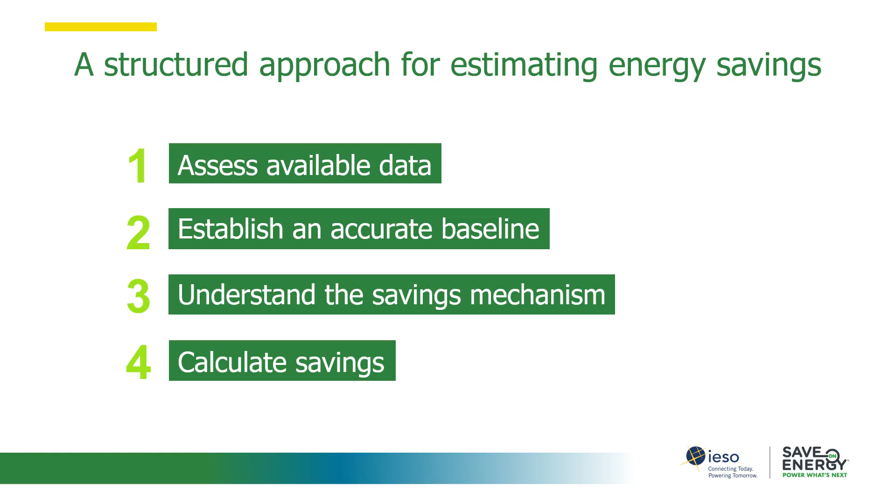In the previous video, we assessed the data that are available about your pumps and fans. We'll now look at the second step of the structured approach to estimating energy savings: how to use the data you have to establish an accurate and reliable energy consumption baseline. This will help ensure you can compare any energy savings estimates against total energy consumption and ensure you're getting reasonable results. To establish a baseline of annual energy consumption for your pump or fan, you'll need to do the following.

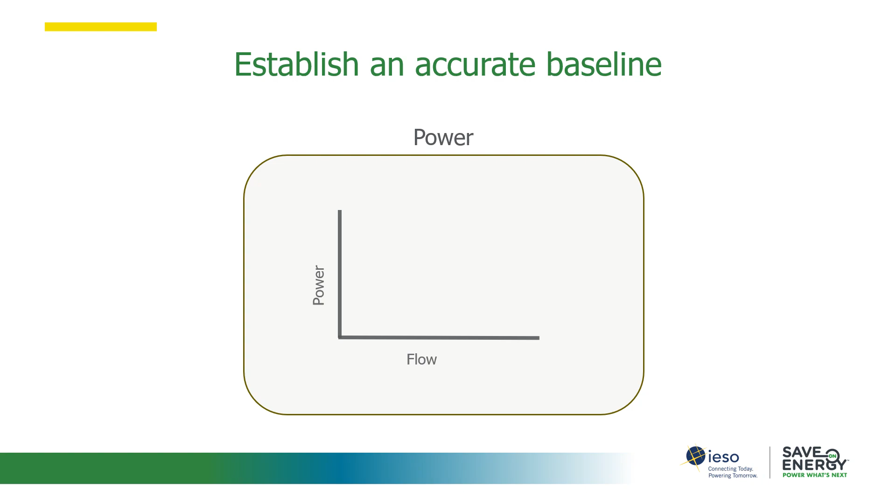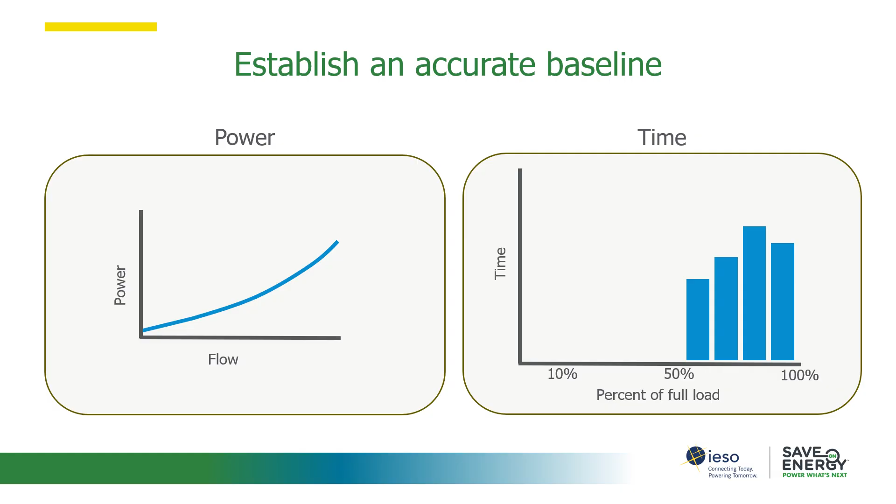First, determine the power draw of your pump or fan at different loads. Second, understand the equipment's operating profile to determine how much time the pump or fan operates at different loads. Finally, combine the results of the first two steps to determine the total baseline energy consumption of your pump or fan.

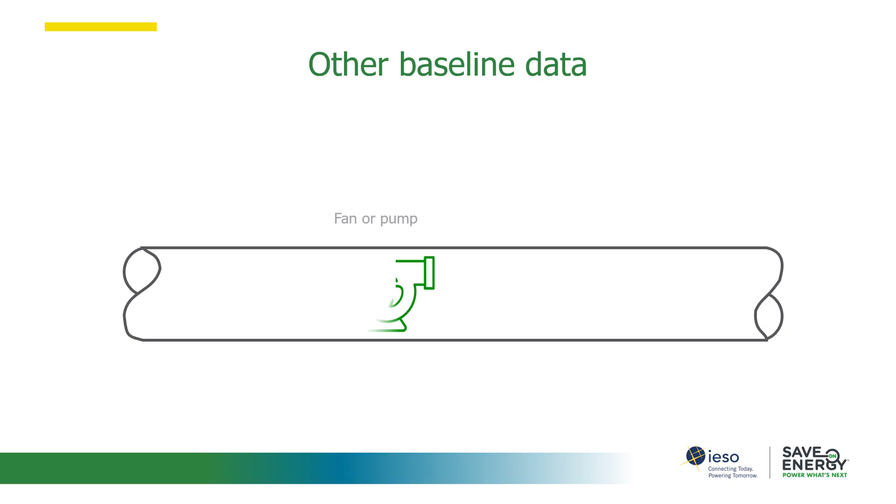In addition to the total annual energy consumption, it's good to know the requirements of your pump or fan, specifically the discharge pressure and average flow. These parameters are important as they'll allow you to compare operating conditions before and after your energy-saving project. However, if these data are not available, the first step in establishing a reliable energy baseline is to determine how much power your pump or fan draws at different loads.

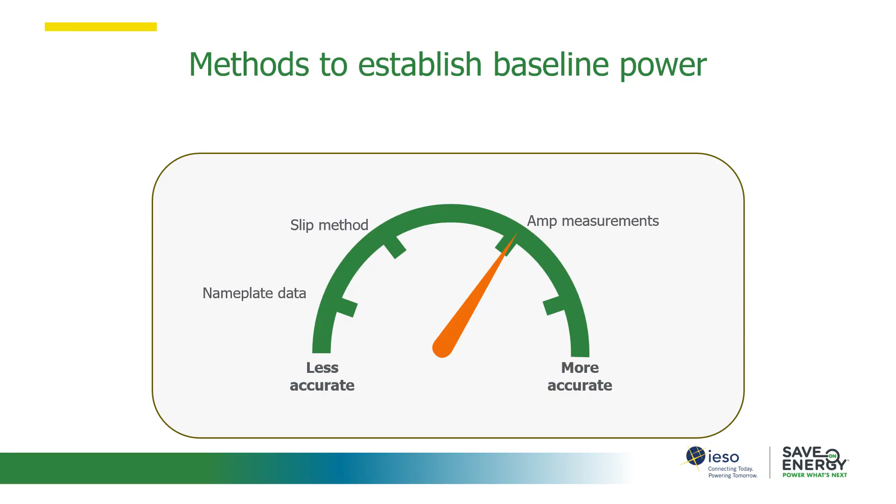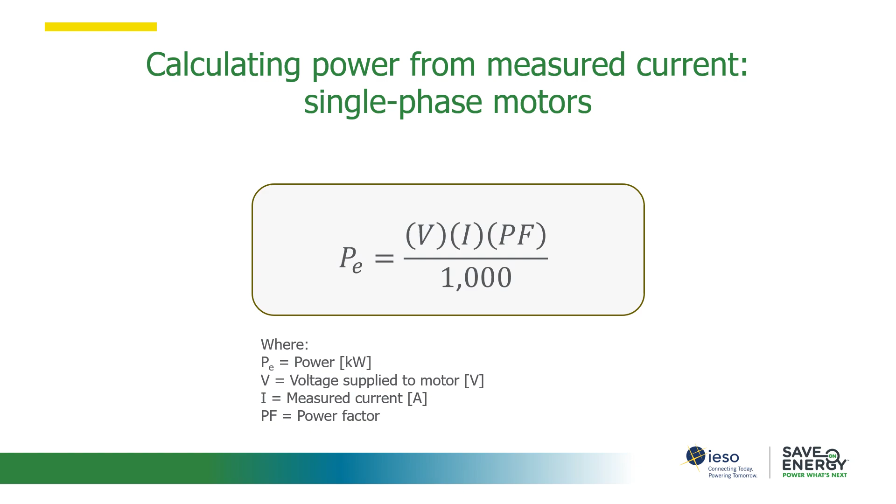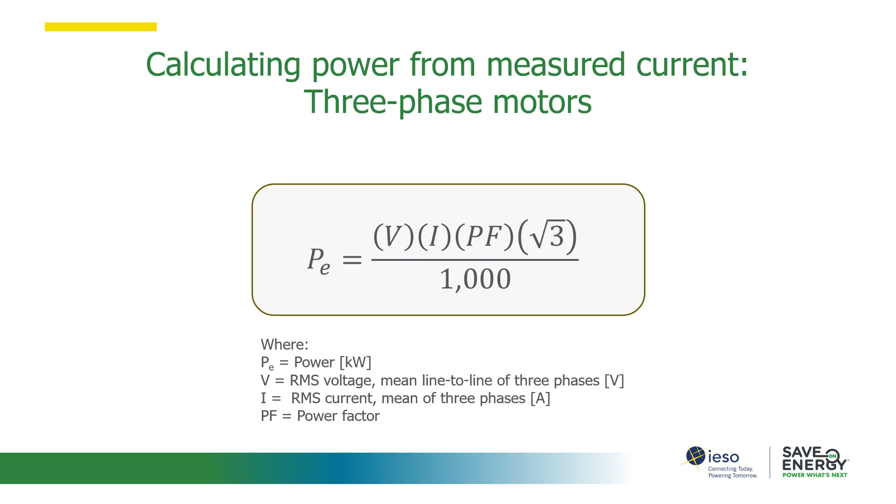For the most accurate data, use a power meter that continuously records power draw over time. Alternatively, you can use an ammeter to measure amps and then calculate power. Although voltage and power factor can be assumed, it's important to remember that the power factor can change with operating load, so an assumed power factor may not be accurate if your motor operates over a wide range of loads, particularly below 60% load.

If you don't have amperage measurements but can measure motor speed using a tachometer or other device, you can use the slip method to estimate the motor load. However, this method is generally less accurate. Finally, if all you have are the nameplate data, you can calculate the motor power by estimating the load factor. The load factor refers to the load on a motor as a percentage of full load. When using this method, remember that most equipment is over-designed and will have a load factor lower than 1. This method is the simplest, but will provide the least accurate results.

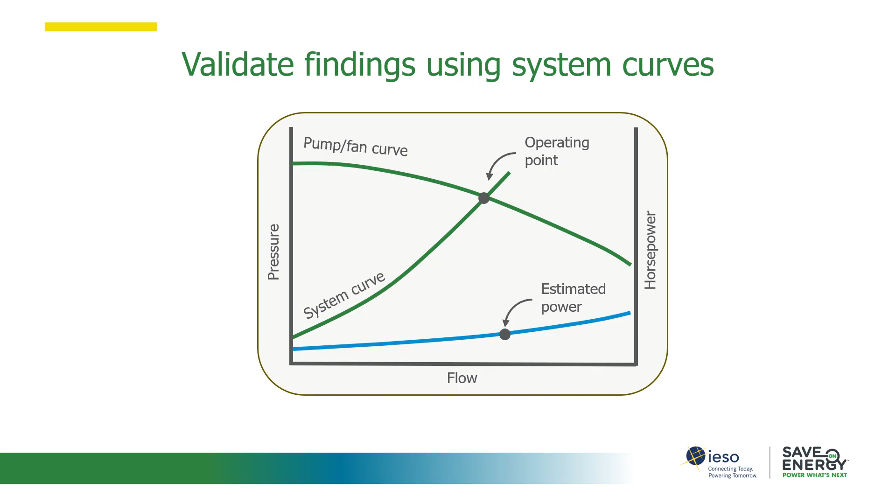If you use estimates or assumptions to calculate power, you can use the system curves and pump or fan curves to check the reasonableness of these calculations. This step is important because it can help confirm the validity of your power estimates. If the curves are not available, you can use pump or fan equations to calculate the mechanical power from pressure and flow measurements.

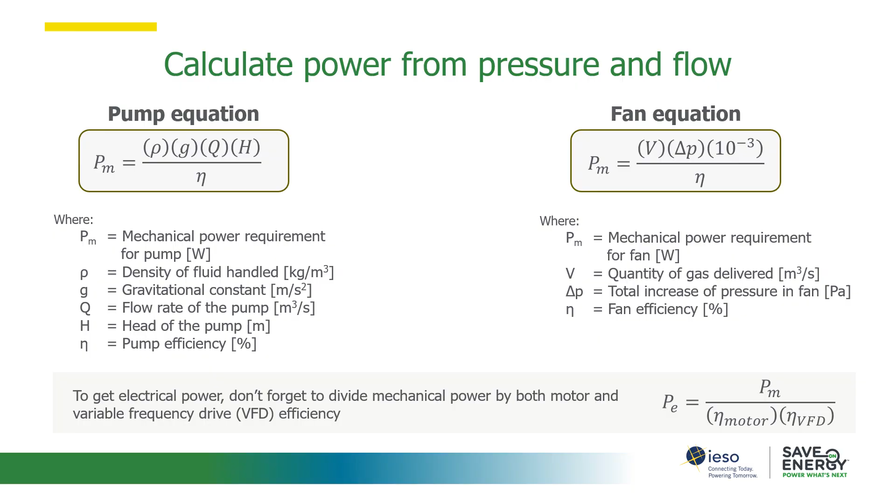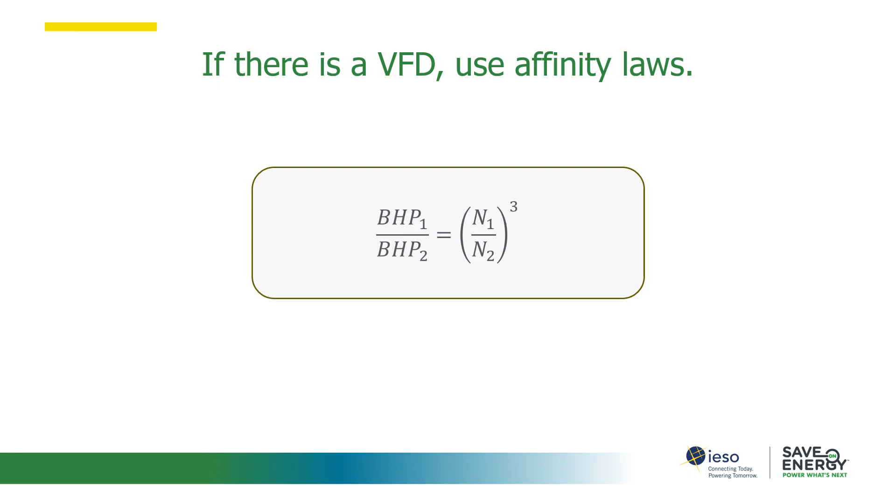While it may be difficult to obtain full measurements for power, flow, and pressure, you should be able to obtain a continuous trend of operating data that provides a proxy for your equipment's mode of operation. Ideally, try to get data from a period of at least 12 months. The duty cycle indicates how much time the pump or fan is actually running and how much time it is off. Many projects overestimate energy savings by assuming the motor is always running. If you don't have equipment duty cycles data, you can manually time the system's operating modes. Make sure you capture a representative sample of all cycles.

You may want to consider how your pump or fan operates to see if you need to invest in some metering equipment to improve the accuracy of your estimates. Does it run at a constant operating point, or does it have different operating modes? Does it modulate significantly to meet system demands? Selecting the correct calculation method for your operation is essential to obtaining accurate data.

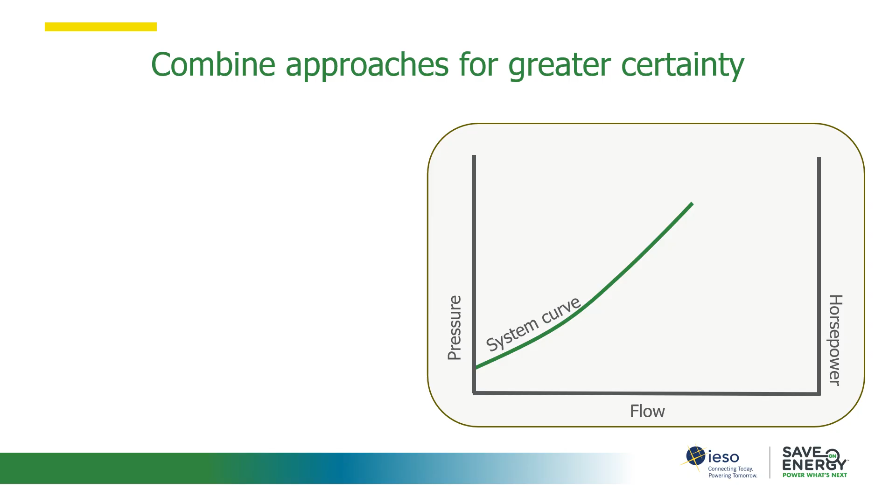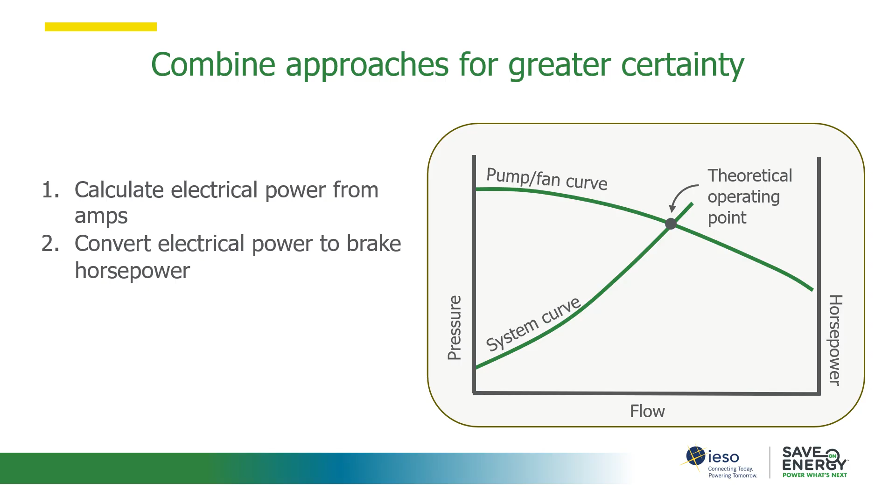Finally, consider combining these approaches to validate your calculations and increase your confidence in the results. For example, if you have a power calculation using amps, the pump or fan curves, and a pressure measurement for the discharge, you could convert the electrical power to mechanical power, or BHP, then plot the pump or fan BHP on a pump or fan curve. Then, check that the curve matches the pressure measurement. If the values don't match, you can investigate and correct possible causes.

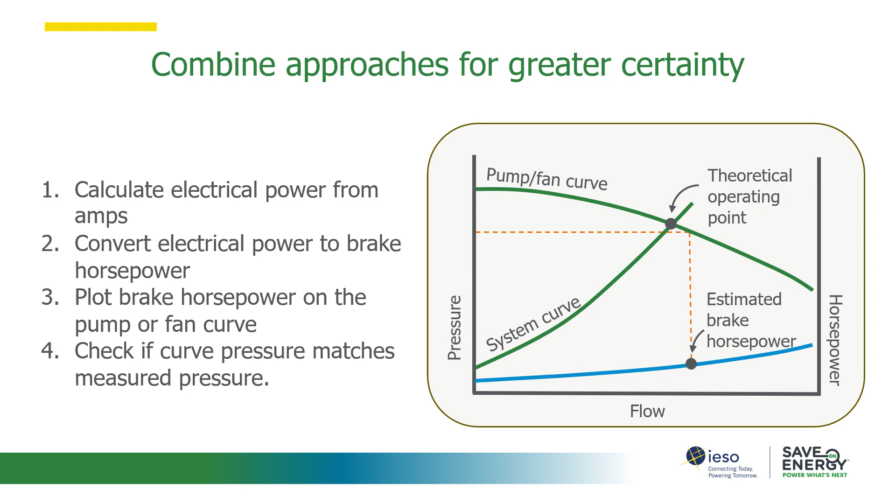Once a reasonable baseline has been established, the next step is to determine the savings mechanism of your energy savings opportunity to understand how these changes might affect your baseline energy consumption. In the next video, we'll look at the different savings mechanisms available for pumps and fans.